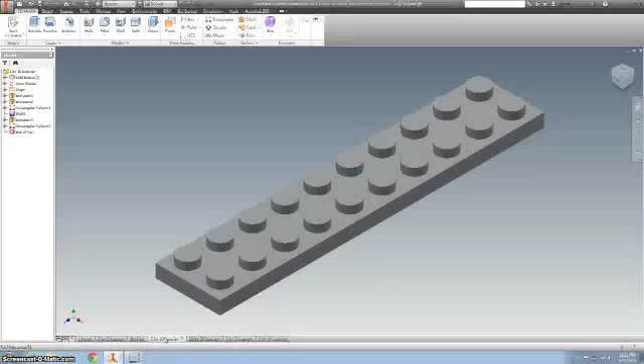Alright, now we're going to make a base. The base is pretty thin, and it's got this circle on the bottom, which is the same circle as we have made on the similar 2x.

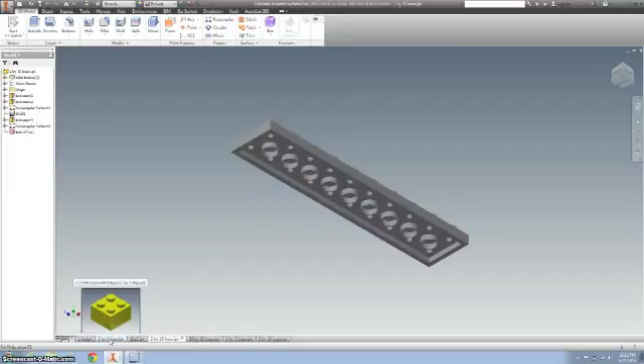We can open up our 2x2. We can go to our extrusion, edit our feature, and divide that by 3, and we've got it done. So we're going to call this a 2x2 base, and this is going to be the one that we start with.

Save as 2x2, and I'm going to change this to base.

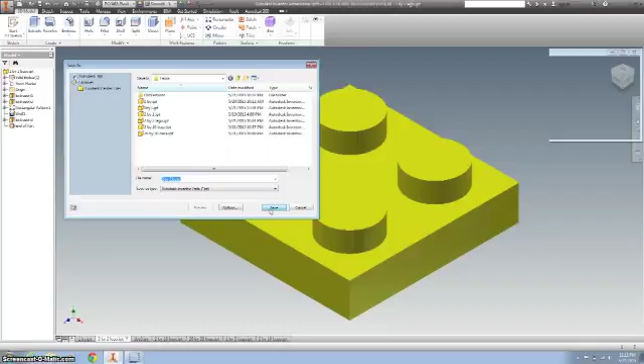Now let's go ahead and make a large 10x10 one. I'm simply going to hit the plus sign on the sketch, edit the sketch. I'm going to change this to times 10. I'm going to do the same thing here, change this 2 units to 10 units. Finish the sketch.

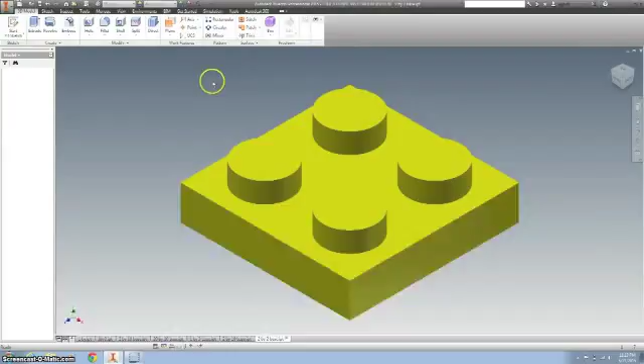Alright, now let's change this rectangular pattern. I'm going to right click on that, edit the feature, change the 2 to a 10, and change this 2 to a 10.

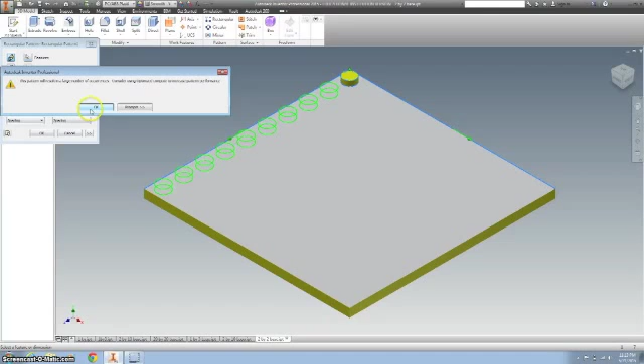You might get this, it'll just say, hey, you're doing a lot of math, you want the computer to do it for you? Yes, I do. So I click OK. Click OK.

Alright, and then I want this circle also to be a rectangular pattern. So when I click rectangular pattern, click on, sometimes it's easier to zoom in. I only want this guy.

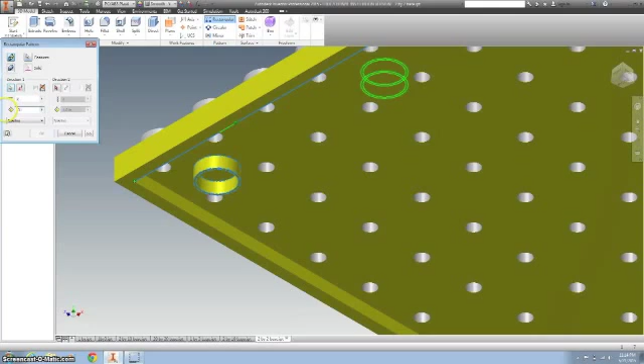So let's put it on one direction. Tough to see, but my arrow is pointing in the right direction. If yours is going the other way, make sure you hit flip. I want to go 0.31, and I believe I want 9 of those. Yeah, because if I had 10, I'd go over.

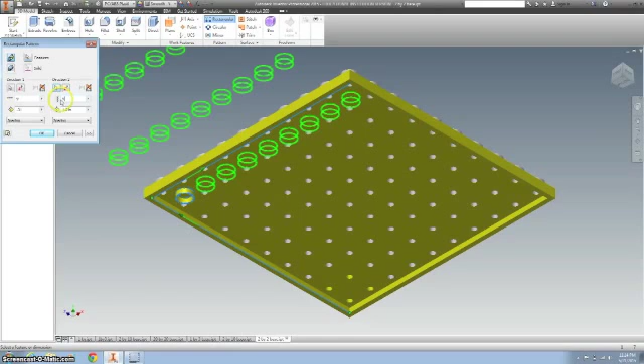So I want 9. I'm going to go in another direction. I want 9 of those at 0.31. You can see mine are going in the other direction, so I want to switch them. Hit OK.

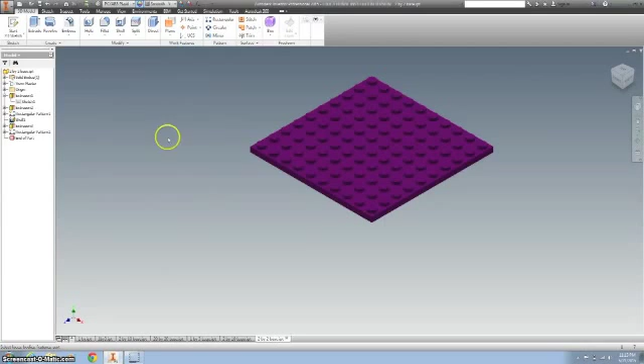Alright, let's change this color to purple. Now I'm going to save this as 10x10 base.

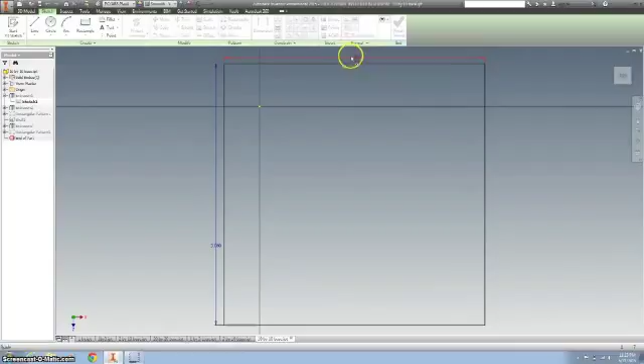Now let's make one that's just giant, right? Same kind of thing. We'll just edit the sketch. I'm going to make it, instead of 10, I'm going to make it, let's go 25. I know I might have said something earlier in the video. Let's go big.

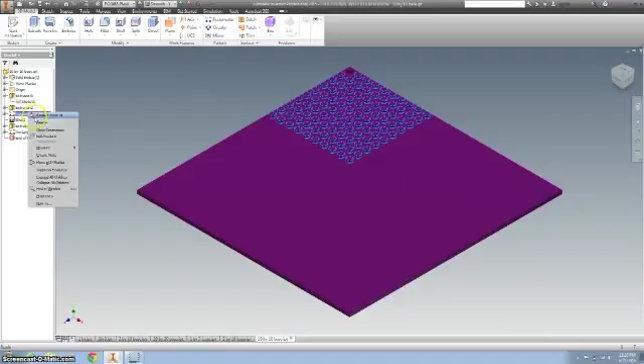Let's edit that feature. Let's make that 25. Make that 25. And mine's not quite showing up until I hit OK.

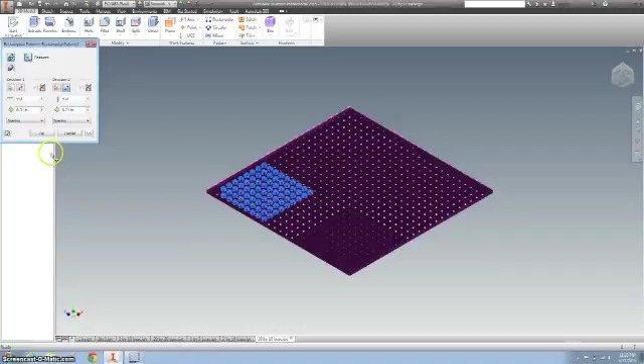And now let's change that on the bottom too, that rectangular pattern on the bottom. So I go right click, edit feature, and I need to do one less, so I gotta do 24. Change this to 24. Hit OK. And then I'm going to change this to...